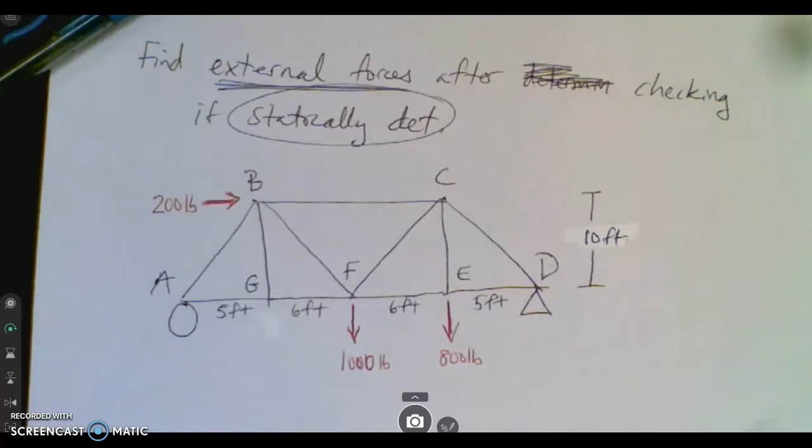Alright, so here is a video for day 2 of Truss calculations. It's really just an extension of the first day. We still have to remember how to check if something's statically determinate. Does 2j equal m plus r? Let's do that first, because I don't even have to do the problem if that's not true.

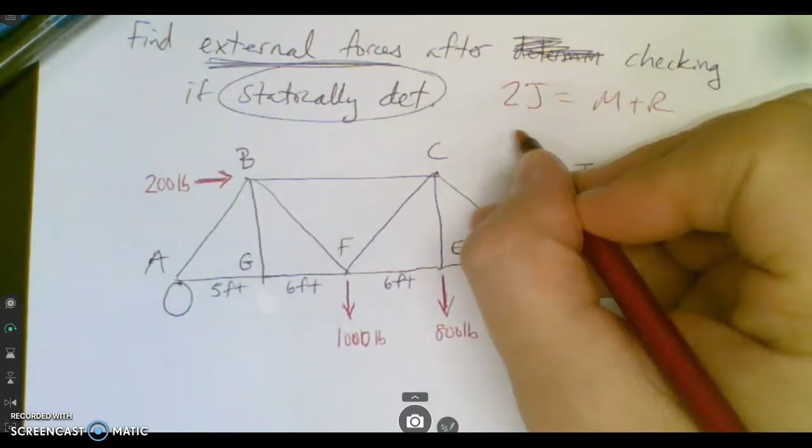1, 2, 3, 4, 5, 6, 7. So I got 7 joints, right? Let me double check. 1, 2, 3, 4, 5, 6, 7. Yep, 7 joints. Members are a little harder.

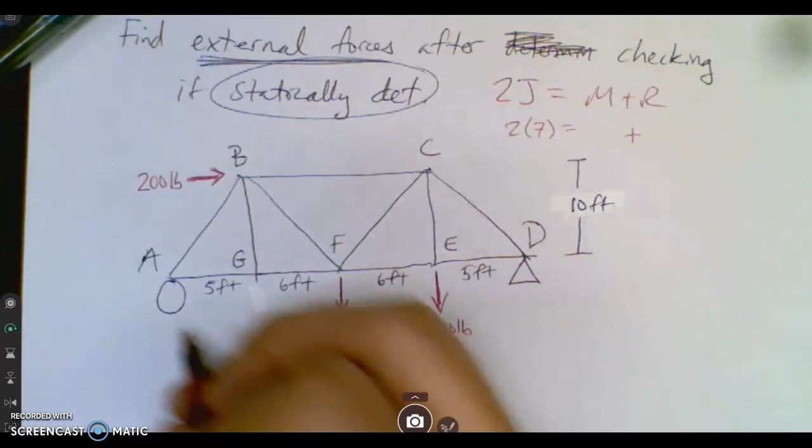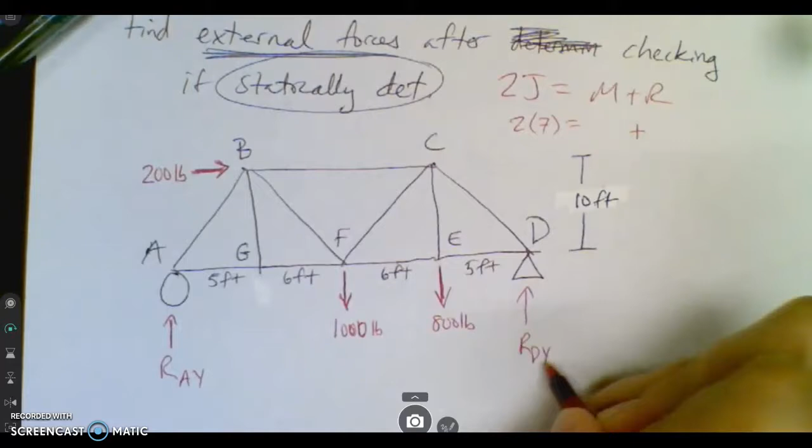Let's take a second on that. Reaction forces. This one is holding that up, and it's a reaction force on joint A in the y direction, also known as our buddy Ray. This one's holding up the bridge, Rudy, RDY, and there's a sideways force because this is the pin connection over in D.

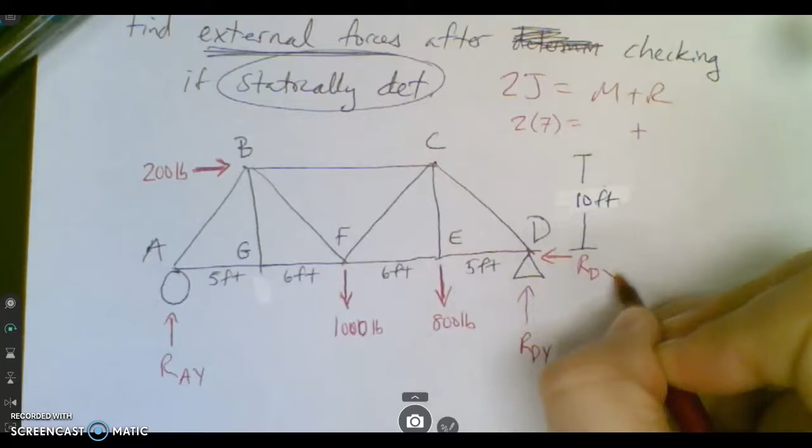Now I can actually use my common sense. Since there's a pterodactyl hitting this bridge at joint B, I do know that RDX, or redux reaction, will be going that way. So I already know, I don't have to draw it the wrong way and figure it out later.

So common sense. So I got a 1,000-pound thing here. Let's say a baby elephant. An 800-pound thing here, so like maybe an adolescent rhino. And a pterodactyl hitting the bridge. I don't know why the animals are going crazy, but they are.

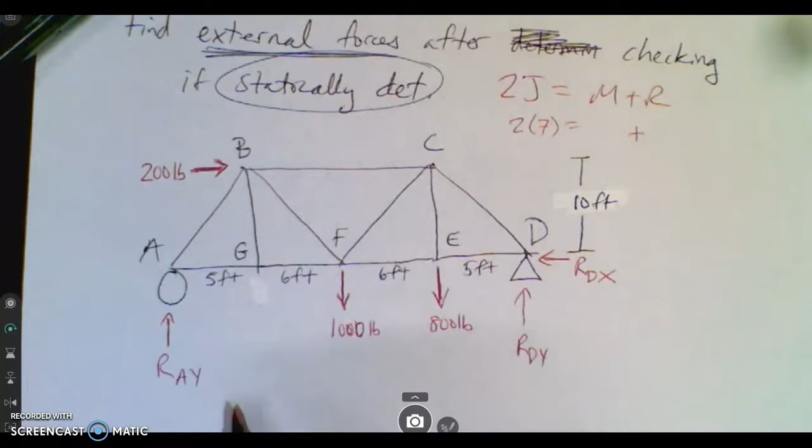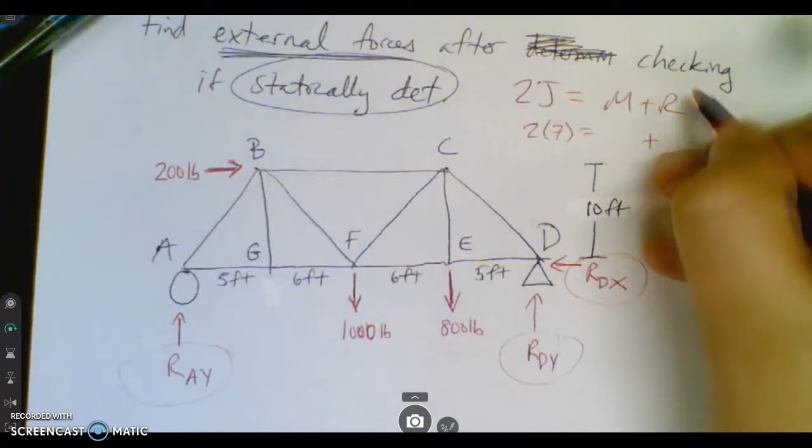Okay, so we're going to try to find out basically all the external forces, which would be this guy, and this guy. We're going to do that with moments, but before we do, we have to see, can we even do this problem? So I have 3 reaction forces, and then let's see how many beams we have.

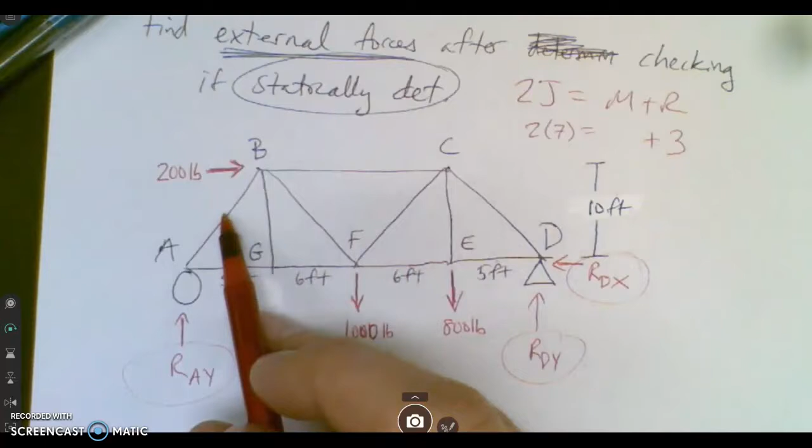I got to make sure I don't miss any. I'm going along the bottom. 1, 2, 3, 4, 5, 6, 7, 8, 9, 10, 11. Does 11 plus 3 equal 2 times 7? Boom! Doing this problem, sweet.

Okay, let's do this problem then. Now I have to see all the wrenches. First of all, I have to pick my pivot point. And since I'm not masochistic, I'm going to pick this one, because I don't want to just punish myself.

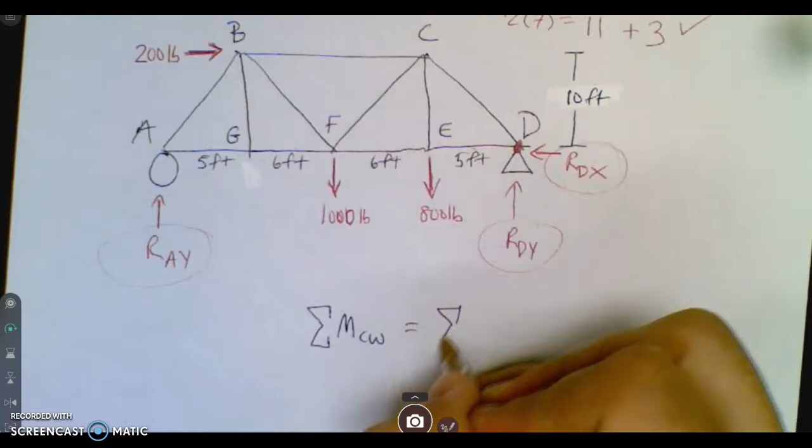And then we got lots of wrenches going on. So here's the key, though. If I want to start finding these, I have to realize that the sum of all the moments that go clockwise better equal the sum of all the moments that go counterclockwise. So I'm going to look at this and go, okay, which ones of these are spinning clockwise? You got to see your wrenches, right?

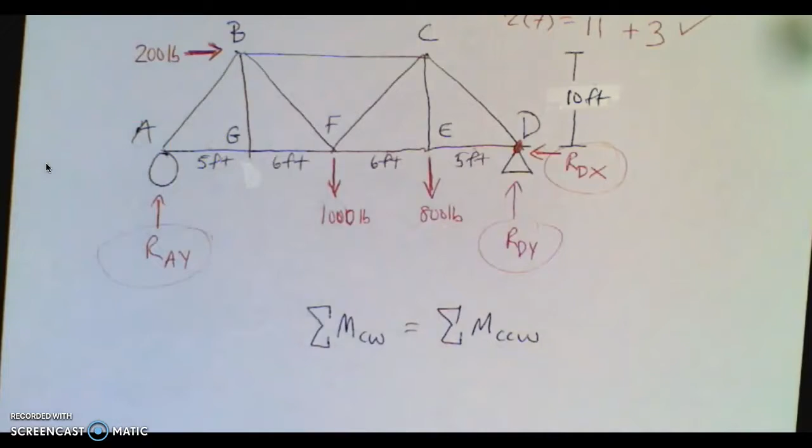So I don't have to check these two because they have 0. Let's check this one. So I got a wrench. This wrench right here is trying to twist down. That would be a counterclockwise wrench. So I'm going to put it on this side.

This blue wrench here, so it's trying to twist the bridge that way. I would take the force, 800 pounds, times its perpendicular distance, so it's going down, so I want its sideways distance, of 5 feet.

Okay, there's another wrench going that way. I'll make it pink here. So we're going to say, okay, this pink wrench goes to the middle. It's also twisting down, so I have a pink wrench that's twisting counterclockwise, so that's positive, right? And that's 1,000 pounds times its perpendicular distance. Now, since it's a down force, I need its sideways distance of 11 feet.

Okay, and then I get all the way out to Ray. We'll make Ray a yellow wrench. Woo! And Ray is fighting the good fight here. Ray is twisting up that way. So he's going to fight those two. So Ray's going to go on this side of the equation.

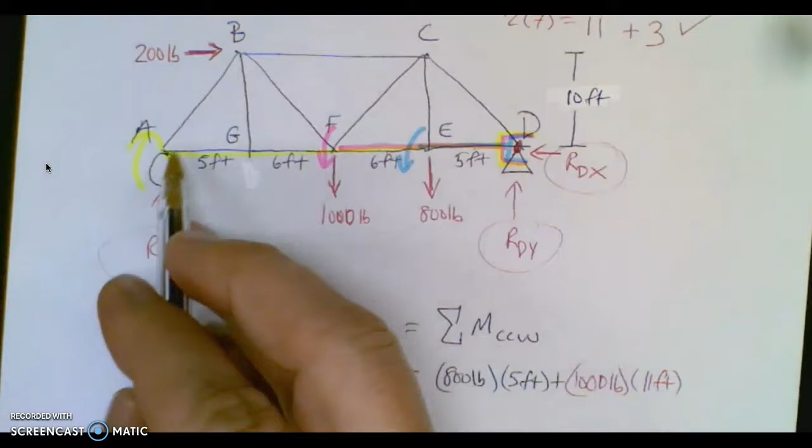So I'm going to have Ray times its distance from the pivot point. So that's 5 and 6 and 6 and 5, which is 22 feet. See how I have my units on there? And then we have one last thing.

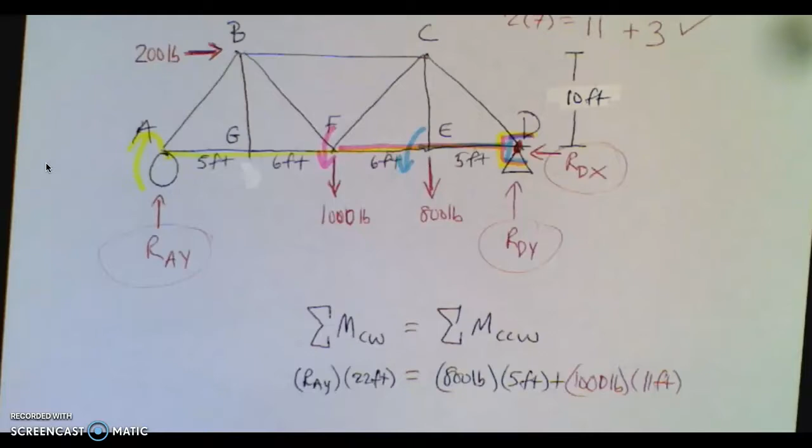This is the trickiest of the bunch, because you got to see this weird shaped wrench. I think I've run out of wrench colors. Aha! I did not run out of wrench colors. I got a purple. Okay, so my last wrench, this is looking kind of trippy over there. Alright, so my last wrench is up here. So if I drew a wrench in here, it's going this way and this way.

It's one of those L-shaped wrenches that you guys love. So now, which way is that spinning? It's spinning, if you push sideways on it, it's going to try to spin the bridge that way. So that is clockwise, so it goes on this side of the equation. Sometimes you have a bunch on both sides or a bunch on one side.

Anyway, this is a pretty cool problem. So my purple wrench is trying to twist this way. It's an L-shaped wrench, and I need the 200 pounds times its perpendicular distance. So if it's a sideways force, I need its up and down distance, which is 10 feet.

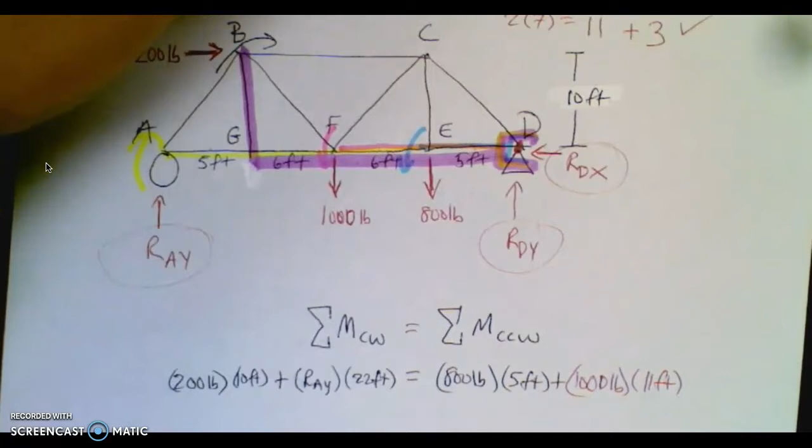Okay, and now I just math it, and I should be able to find out the one missing thing, which is Ray. So this is 2,000 foot-pounds plus Ray times 22 feet equals 800 times 5. What's that going to be? 4,000 foot-pounds. And then here, I'm going to do that, so 11,000 foot-pounds.

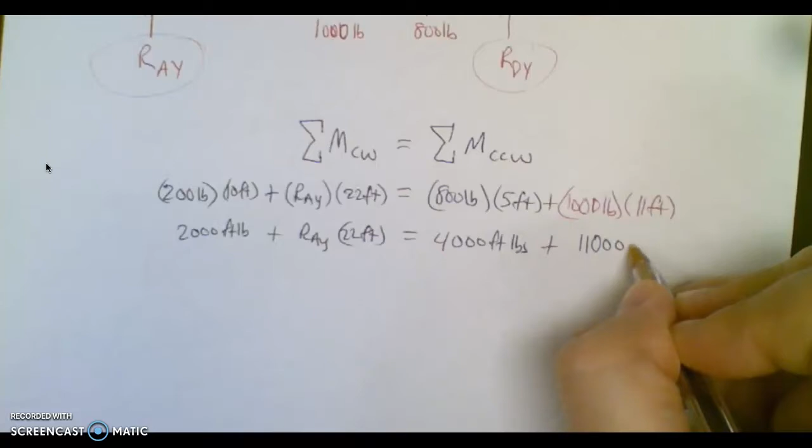Okay, let me get a calculator because the division's going to get weird here. Alright, so we have 15,000 foot-pounds over here. So I add those two together. And that's still Ray times 22 feet plus 2,000 foot-pounds. So I'm going to take away 2,000 foot-pounds from both sides.

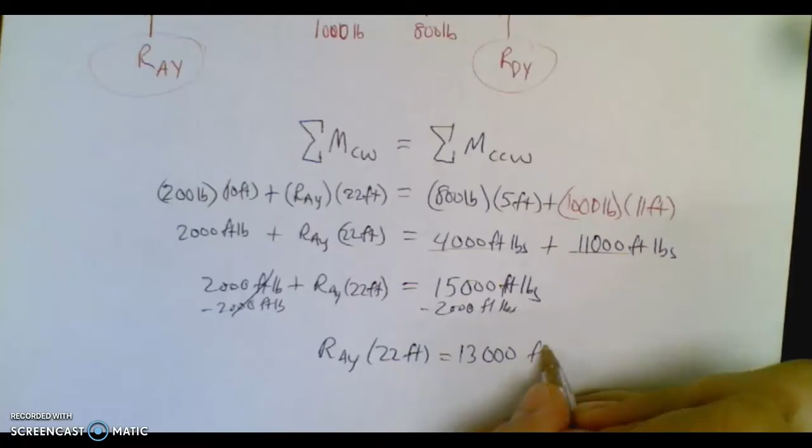And we'll have Ray times 22 feet. So take away the 2,000 there, and I get 13,000 foot-pounds. So I keep my units the whole time. And now, if I want to get Ray by itself, I divide by 22 feet.

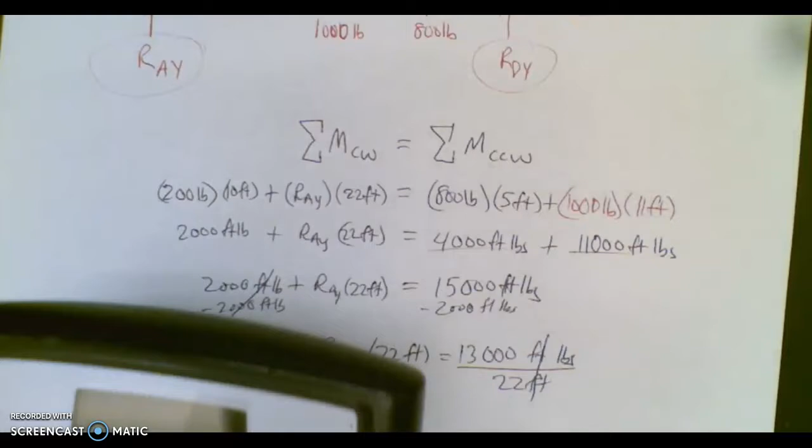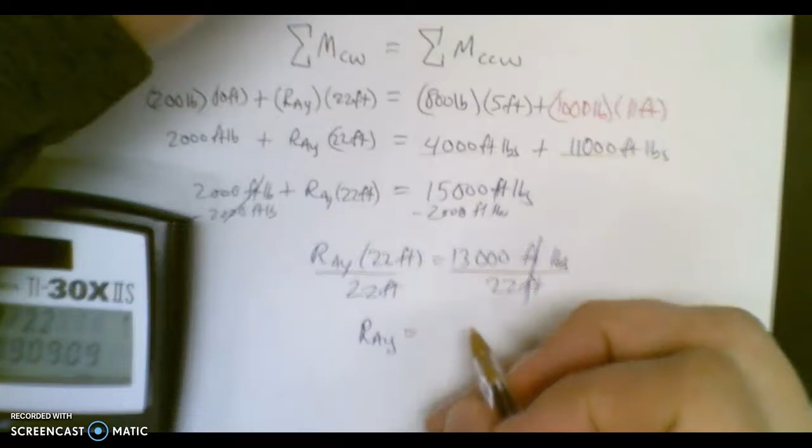And we'll go 13,000 divided by 22 gives us 590.91. So Ray equals 590.91 pounds. Okay, so that's one of my answers. But we're not done. We can get the other answers now. So Ray is 590.91.

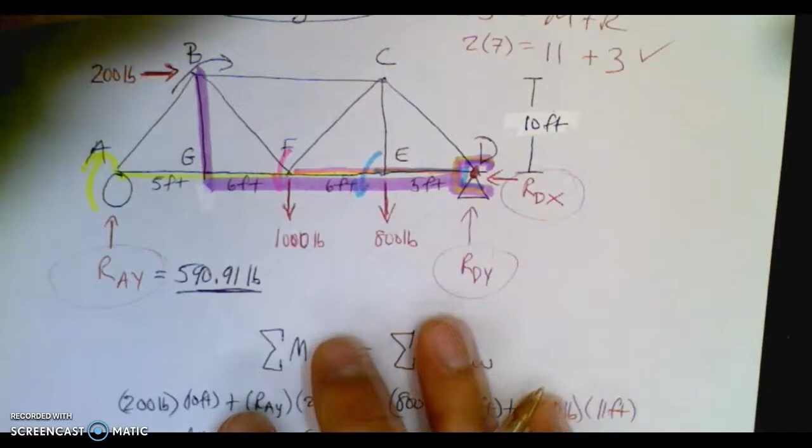The other ones here, I already know I can find RDY, because to find all the other ones, after you do all that work with the twisting forces, then you basically have to just remember that your sum of your ups has to equal your downs. Anyway, so my ups have to equal my downs, and my lefts have to equal the rights.

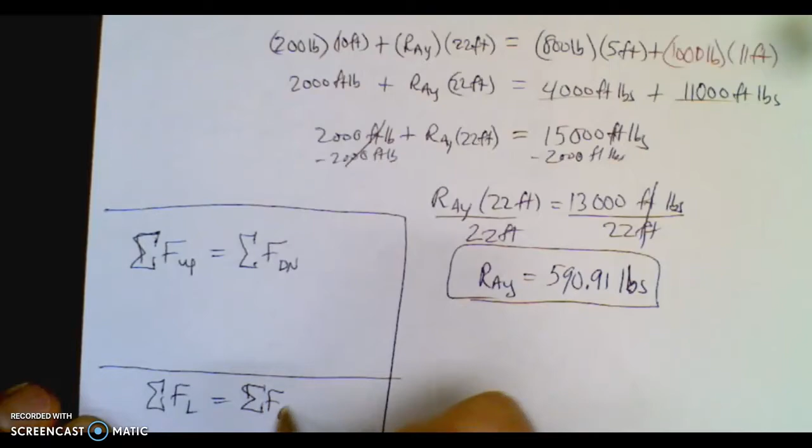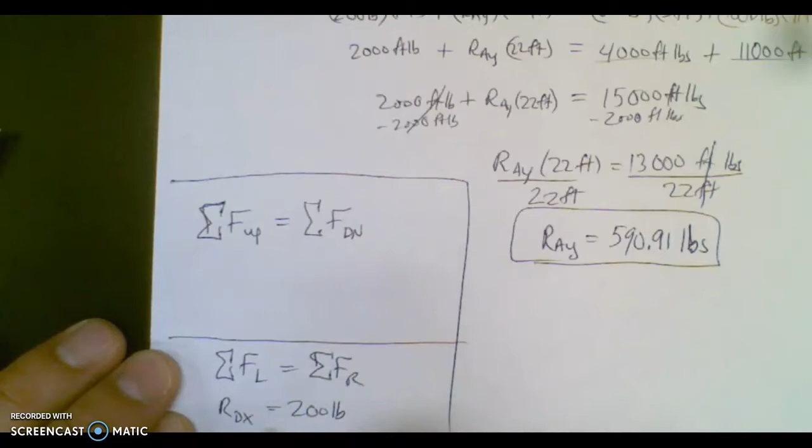Okay, so the cool, easy one to get here is RDX, because if you look on this whole picture, there's only one force pushing right and only one force pushing left. So if my lefts have to equal my rights, my RDX has to equal 200 pounds. There's another answer. Boom. Easy peasy, right? That one was easy.

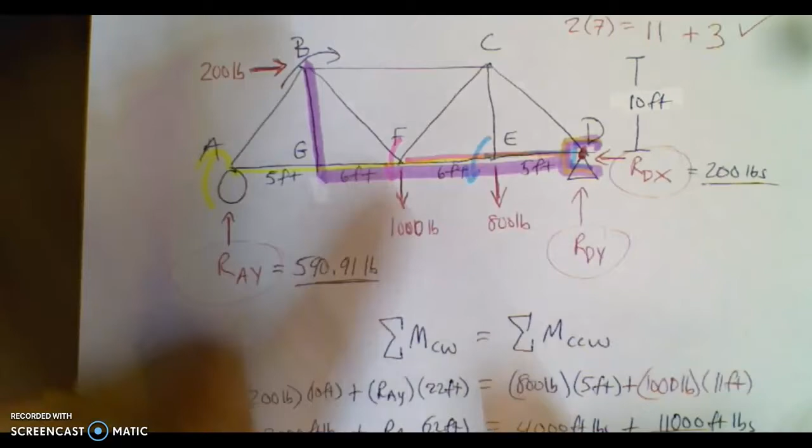One more, RDY. Well, the good news is my ups must equal my downs. So if I look at this, I have two ups. I just figured out what that one was, right? And I have two downs. So RDY has to go together with Ray. So Rudy and Ray are teaming up.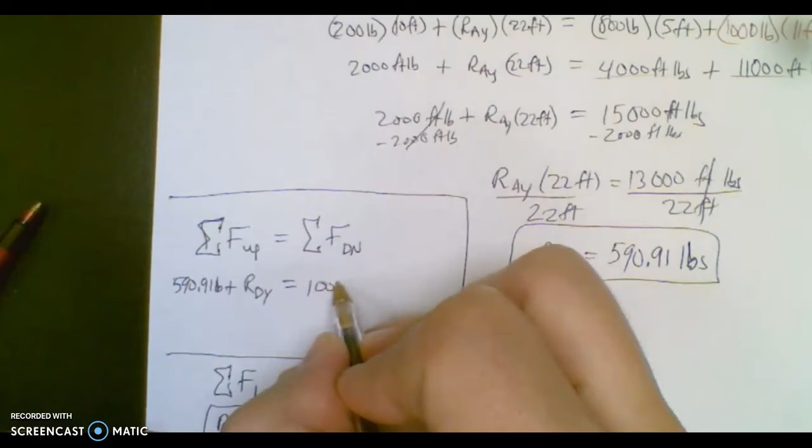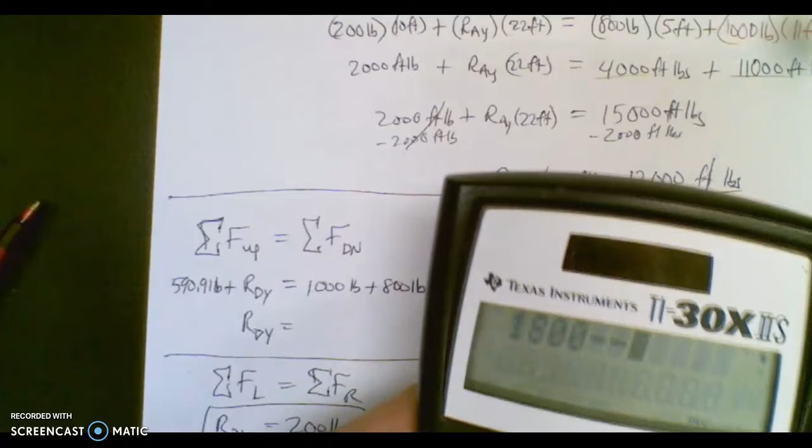So I'm going to have my 590.91 pounds plus R D Y equals my 1,000 plus my 800 for my rhino and baby elephant. And then, you know, you got 1,800 minus 590, and R D Y, let's see what that's going to be. 1,800 minus 590.91. I think 2 decimal places is fine.

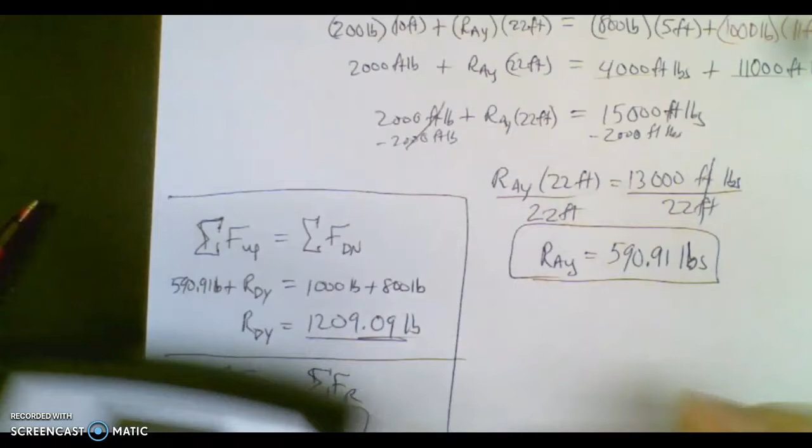We don't need to go any further than that. 1209.09 pounds. And now I've found all the external forces. You'll notice later on we got to find all the forces on inside the beams. But right now we're just finding all the forces acting outside. So I got these pushing up, this pushing in, those pulling down, that pushing over.

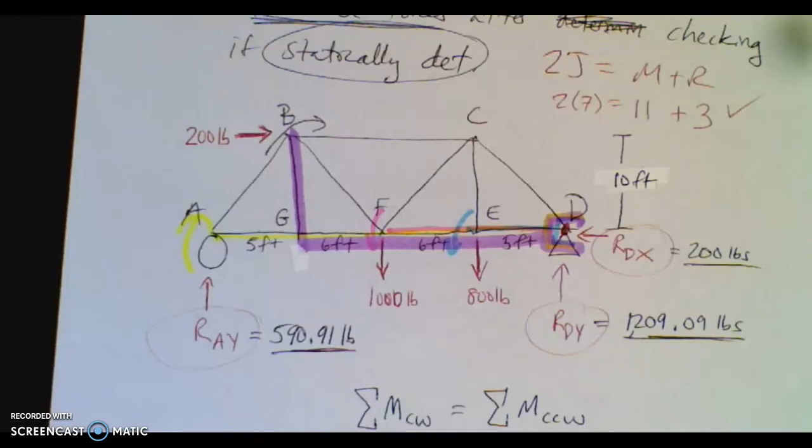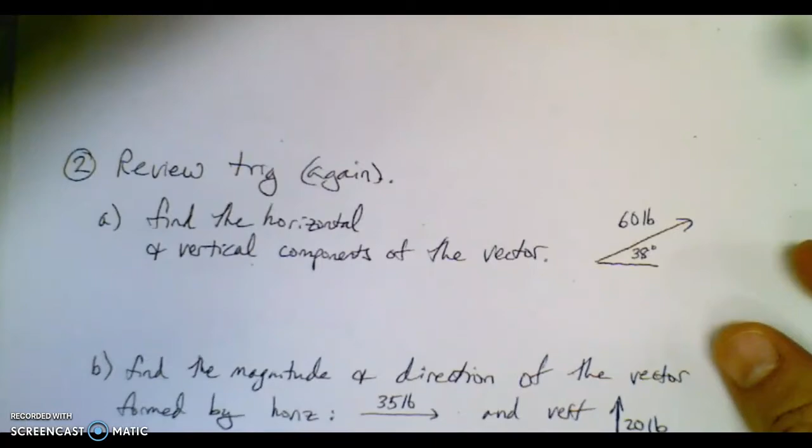Woo! That was big time, man. Okay, so with that, you can probably, I'm going to put this blank worksheet online and see if you can try that. And then at the bottom, I put a little review here. I put another video that should help. It was like review from that warm-up. I went over that warm-up. But basically, these are the skills, the 2 skills we have to have in our brain for our next step.

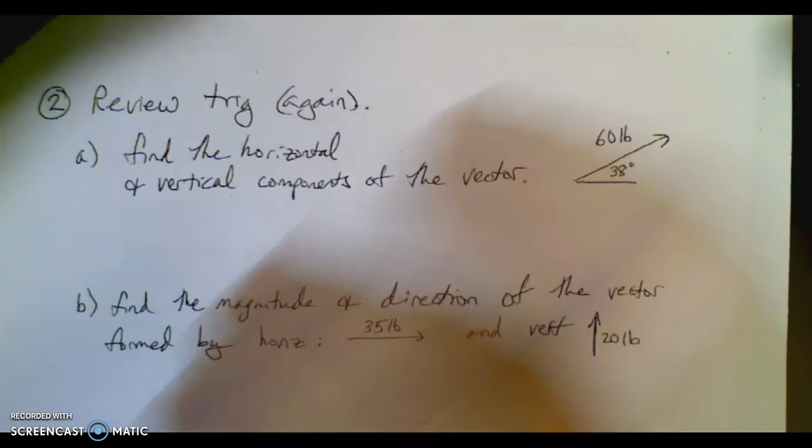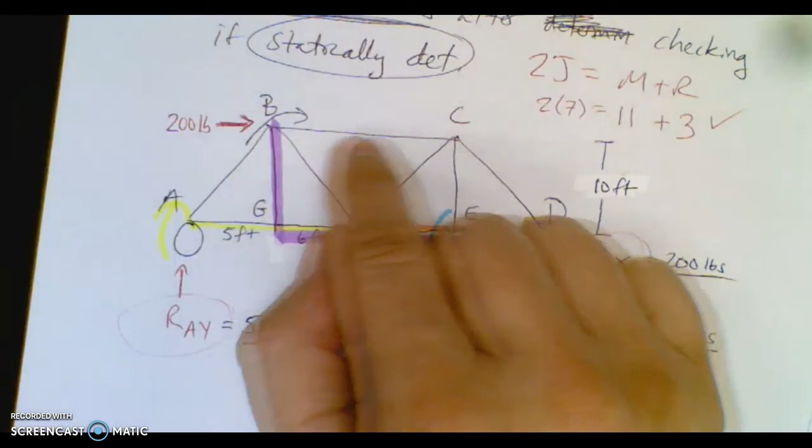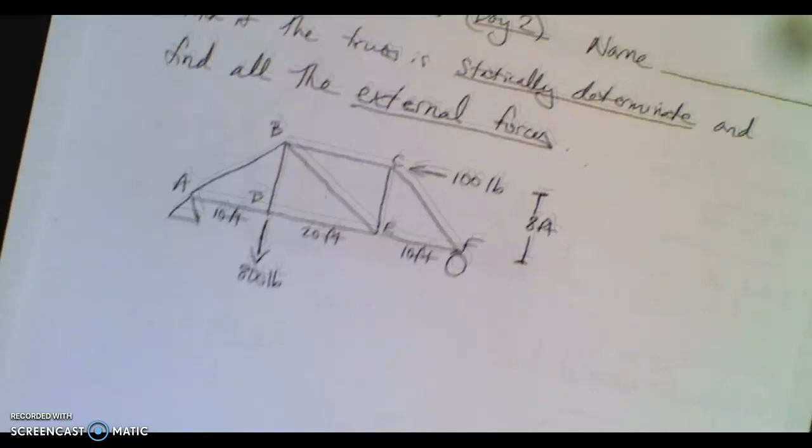Our next step is when we start going after the internal forces on a truss. So we've only been focused on forces acting on the outside of a bridge. Next, we're going to actually start looking into the forces inside the beams and stuff. All right, so if you practice this, print this out, then I'm going to put it online, and then try it. It's not going to be bad. All right, talk to you later.